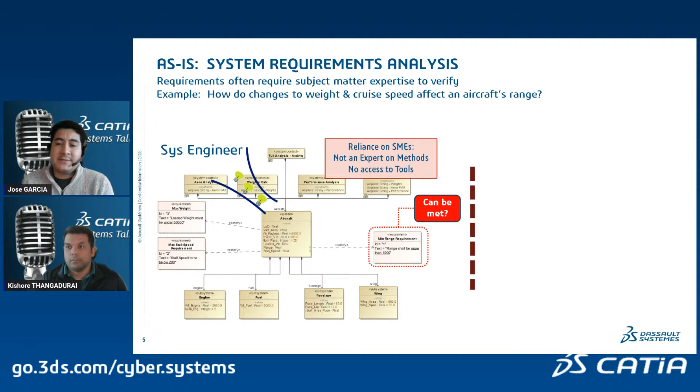The systems model already provides a descriptive definition of an architecture. However, the ability to assess its performance is incumbent on underlying specialized models developed by subject matter experts. Early design insights would be valuable to improve a design, but it is challenging to communicate and iterate due to expertise barriers, different data exchanges, and disjointed technical tools.

These siloed processes are slow, inefficient, and non-scalable. They introduce additional risk of human error and lack rigorous traceability. They also lack the opportunity to perform meaningful trade studies because we can't run them thousands of times without large hits to personnel availability.

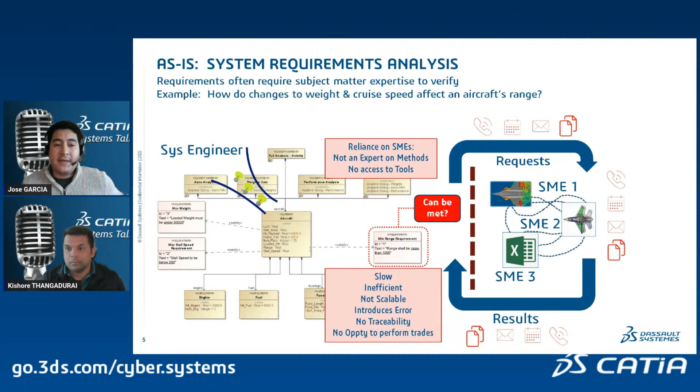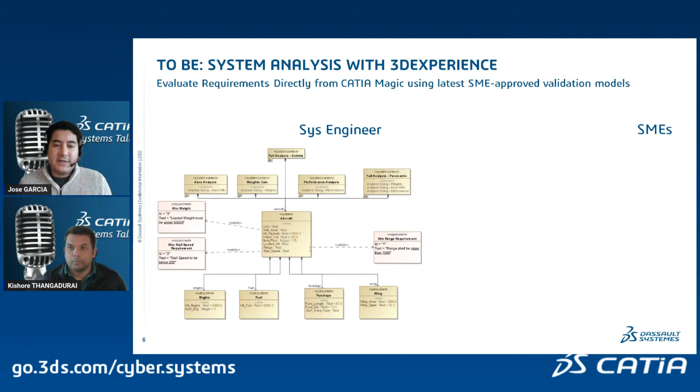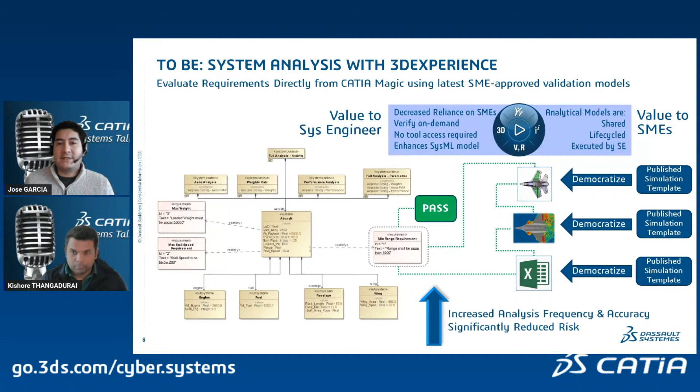A model-based approach is now the standard for modern system design, and its next step is integrated simulation. SMEs can develop and share their simulations with system engineers by utilizing the 3D Experience. The system engineers can then integrate those templates directly into the system model, eliminating siloed processes and enabling traceability and scalability. The net benefit is an increase in analysis frequency and accuracy, thereby reducing risk earlier in the design cycle.

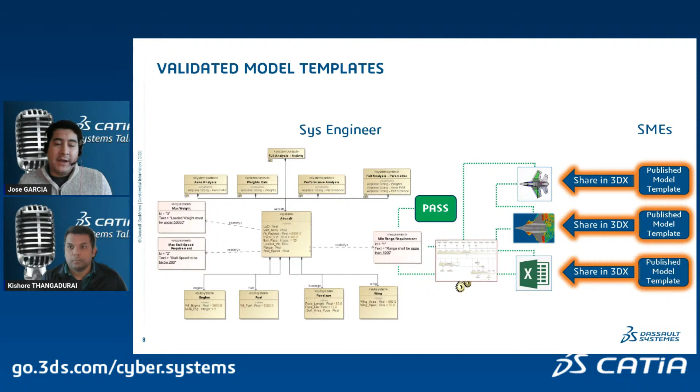So let's dive into how we can integrate these simulations. To go through these stages of the workflow, first we'll cover the creation of the shareable model templates to the right. So I'm going to hand this off to Kishore to cover.

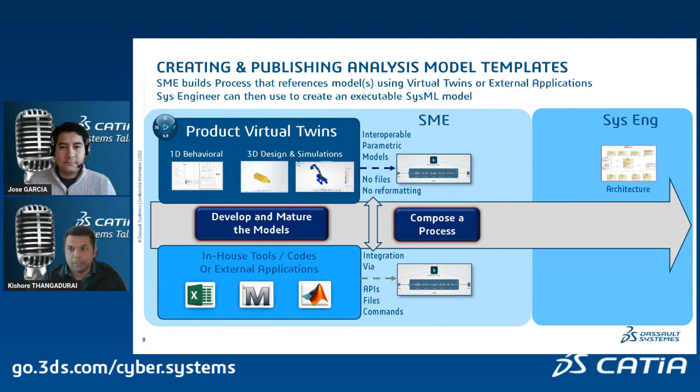Thanks, Jose. So first, a SME will develop and validate their models just as they do today. These can be product virtual twins on the 3D Experience platform, or simulations built with in-house tools and external applications. Second, the SME will compose a simulation process to define a workflow of their model and data processing activities. We will dive further into this in the simulation process in the very next slide. Third, the SME will configure the execution of the simulation process to create what's called a template.

This template is then shared with the systems engineer for them to add to the system architecture model and be able to launch an integrated simulation.

So to recap, we have SMEs controlling and validating their high fidelity models and specialized simulations in formats they use today. SMEs composing simulation process and templates from their models and sharing them. And systems engineer utilizing these shared templates to perform system analysis.

These templates directly document the SME's workflow, and inefficient communication loops have thus been removed so that the systems engineer can now leverage the subject matter expertise for as many analysis iterations as needed without having to tie up the SME availability.

So let's now talk about composing that simulation process. The Process Composer application provides you with a no-code drag and drop interface where you can define anything from a simple to a complex workflow. Within these workflows, you can define the necessary parameters, which kind of represent in the systems engineering the value properties, and logic to launch different tools, pass information between them, and define where they would execute.

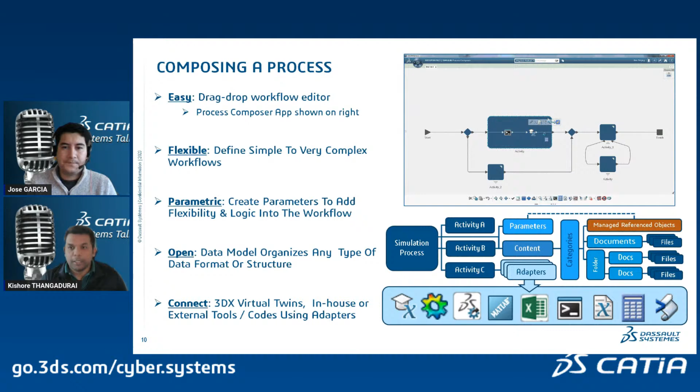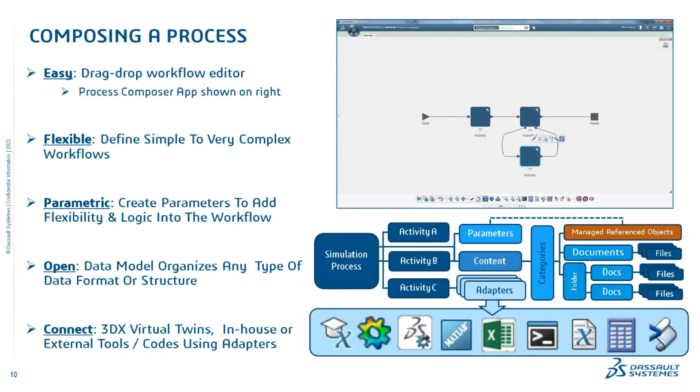Once you have the workflow defined, you would then create a simulation template exposing only those critical parameters for non-experts to feed in. So to reiterate, the open data format and adapters enable us to connect everything from the 3DEXPERIENCE virtual twins, in-house tools, and external applications, including code scripts, and build a template that can be then leveraged and used by any non-expert and systems engineers.

So in this example, like Jose said, we are looking at an aircraft architecture. And to help Jose as a systems engineer here, SME has developed 3 different simulation templates. It's the weights calculation at first that's made based on a parametric CAD model. It calculates the weights from the preliminary aircraft geometries, dimension updates.

They also have an aerodynamics calculation. This is based on fluid simulation, estimates the lift and drag of the aircraft based on the geometry updates. This essentially is executed on an HPC cluster. We also have a reduced order model developed for this, for it to be executing in a much faster fashion.

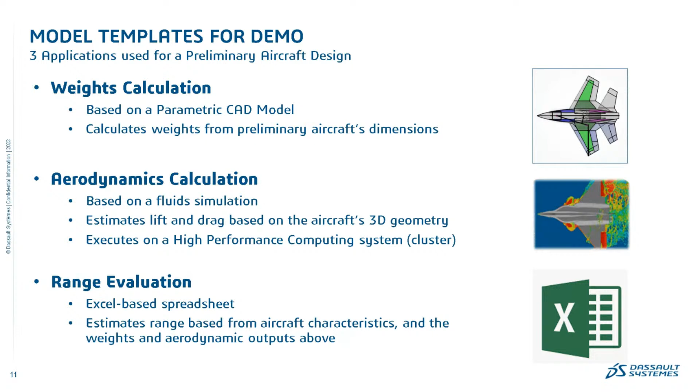And then finally, a range evaluation. This is an Excel-based spreadsheet. It estimates the range based on the aircraft dimension updates, and also the weights and aerodynamic outputs calculated in the above two simulations. So to look at this example, let's pass it back to Jose. Thank you, Kishore.

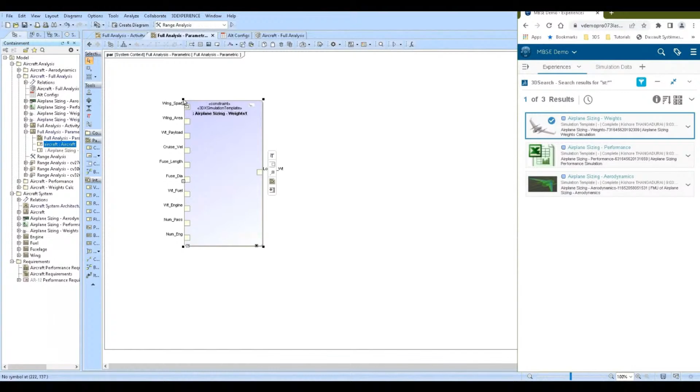So we start with a diagram within Cameo showing the aircraft, its subsystems, requirements, and analysis context blocks. We create a parametric diagram and we bring up a web browser window where we are already logged into the 3DX platform. From the web browser, we can drag and drop the SME created templates onto the diagram. Cameo automatically creates input and output pins, and the parametric equation wizard recommends parameter connections.

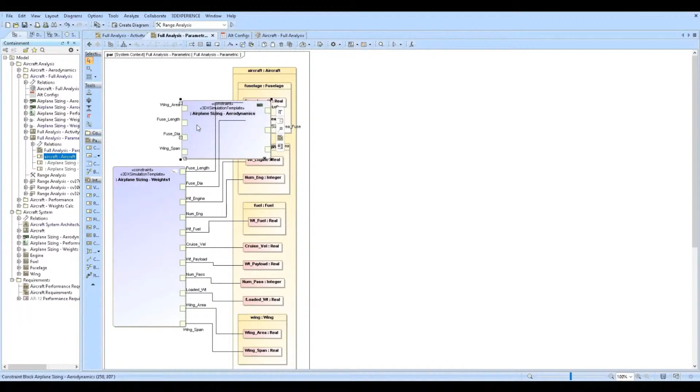We drag and drop the other 2 templates and set parameter connectors, which will enable us to pass values directly from the SysML model to the SME templates. In addition to parametric diagrams, we can also integrate templates into activity diagrams. Here we have dragged and dropped the templates from the 3DX platform and connected the pins in a similar fashion as the parametric diagram.

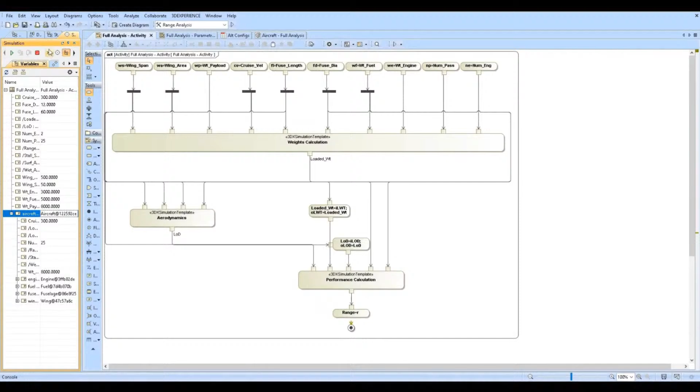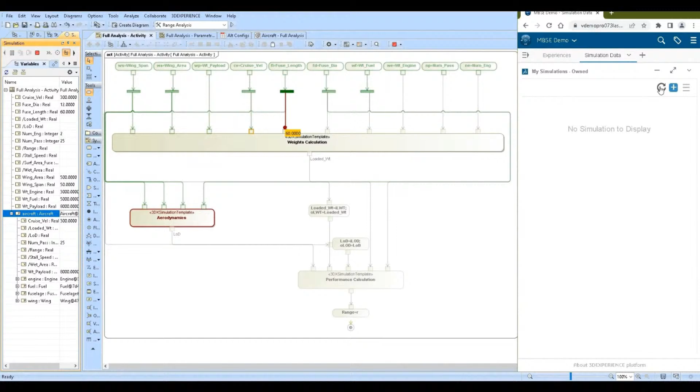We will run the simulation, and on the left you will see the system of interest and some predefined input parameters. When we start the simulation, you will see the parameters being read and fed into the templates. Once the templates have the required inputs, they will begin executing on the platform and returning results back to the Cameo model.

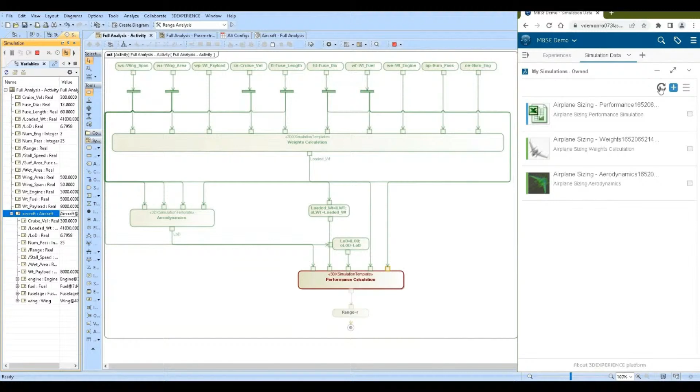For this example, we want to calculate the range for an aircraft given a set of inputs to see if the design can satisfy a requirement. At the end of the simulation, we will hover over that range parameter to see the associated requirement text, and you can already see that the range value is highlighted in green, telling us that we pass given the provided inputs.

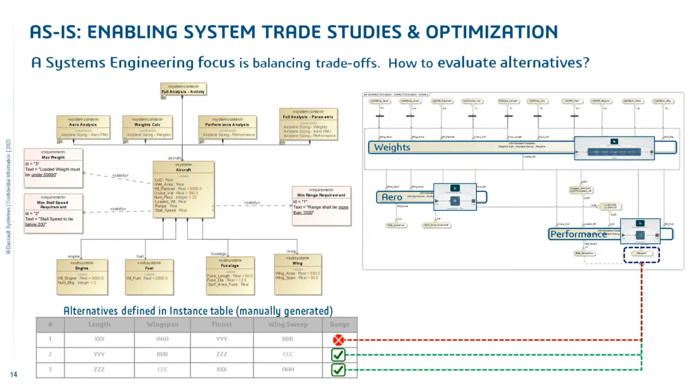All right, let's dive into how we can enable trade studies from this. In the previous video, you saw me run a simulation that evaluated range requirement satisfaction of a single aircraft design. If we wanted to evaluate different system configurations, we might create an instance table and run simulations for those configurations. We find that this approach can be tedious.

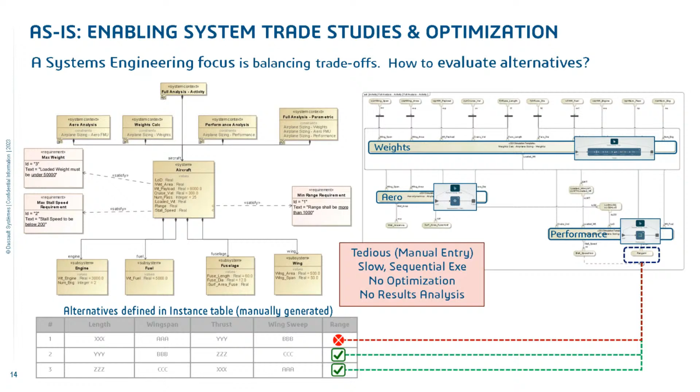Simulations are run sequentially on your local workstation and likely slow. System alternatives are your best guesses without true design exploration or optimization. So let me pass this off again to Kishore to discuss how we can address these gaps.

Thanks again, Jose. So yes, like Jose said, what you saw in the first video was a single iteration. And as you want to perform or explore the complete trade space, let's look at how the 3D Experience platform can help you here. The application of choice here again is Process Composer. As we saw in the first section, Process Composer uses adapters to connect with external tools and launch those tools. So we have the Cameo or MBSE adapter here that ties in your system model.

The system model can be integrated at any level of the system configuration. Once you have that tied into this workflow or as part of the process, it can then be driven using the driver adapters that use different techniques that are built into the platform, like DOE, optimization, and reliability techniques. To dive a little bit deeper on those, what the 3D Experience platform has is 11 different design of experiment techniques that help you efficiently assess the design space or the trade space.

We have 16 optimization techniques to drive design towards desired objectives. That also includes DS proprietary hybrid optimizers. We also have Monte Carlo simulation for reliability to evaluate robustness of designs by introducing uncertainties and tolerances. Okay, so as you tie into one of these existing techniques, what we also help you with is automatic generation of that trade space or design space.

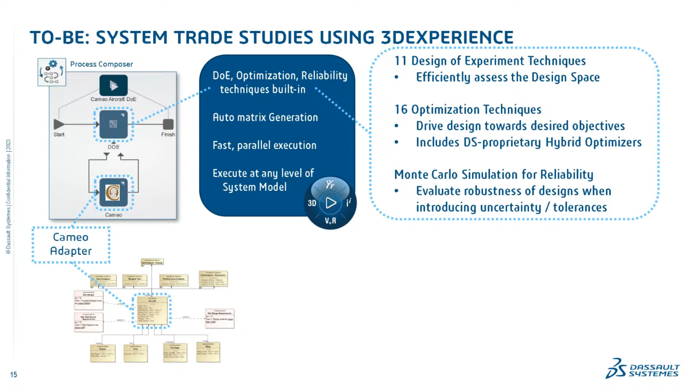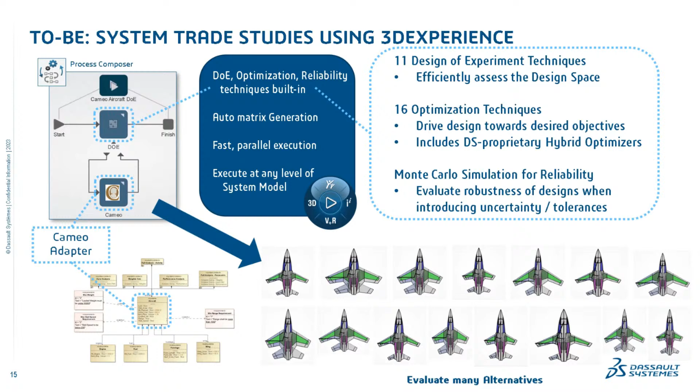You specify the upper bounds and lower bounds and the different parameters or criteria, and it automatically builds the design matrix for you. Not only that, thanks to the distributed execution capabilities of the 3D Experience platform, we are able to execute these in a fast and parallel fashion. And like we talked about before, you can execute this system model at any level. So we run that, different alternatives are generated. So in this case, we are changing the aircraft's dimensions to see which aircraft might meet our requirements best. So we have generated tons of different alternatives.

What next? Now we have tons of data in our hands. How do we proceed from here? To enable you to perform that trade-off and pick and process these data and understand what might be the best design, we introduce Results Analytics. Results Analytics is a web-based widget. I like to call it the decision support tool in the 3D Experience platform that helps you easily manage all these large data sets that were generated.

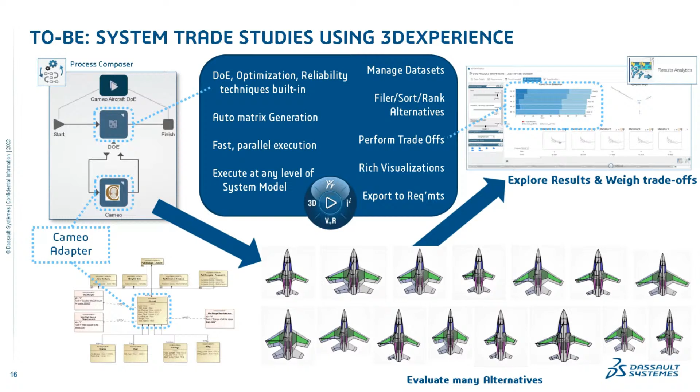It automatically filters, ranks, and scores all these different alternatives and enables you to perform trade-offs thanks to its rich visualization capabilities. Also, to highlight here, it helps you export an FMU, a reduced order model, from these huge data sets, and also provides you the capability to export and tie back to the requirements that you began with.

So let's take a look at an example in this case. So we are going to use the same aircraft system model to calculate the range. We're going to drive that using an optimization adapter to explore the complete trade space to see what design alternative might best meet our requirement. So I have the Cameo adapter here. That blue box is called an activity. And the Cameo adapter, of course, is going to launch the application. And you can see that we have parameters defined which correspond to the value properties of the system model.

So once I have that integrated, then I can drive that using an optimization adapter. There are various optimization techniques available. We are using the adaptive DOE technique. The section here shows the configurations of the optimization. In this case, we are using 10 different combinations, and I think 42 points per each iteration.

And I'm able to also quickly define the design space or the trade space. This information can be directly read from your system model if it is defined so. Otherwise, you see that you can quickly define the lower bound, upper bound, step size, and whatnot to define the trade space or the design space. You are also able to define constraints and objectives, of course. In this case, we are trying to maximize the loaded weight and also the range.

On top of that, like I mentioned, using the 3D Experience execution backbone, we are able to execute this in a parallel fashion. So once I have that workflow finalized, I'm going to run this. To highlight the distributed capability of the execution, it lets you run this on server-side simulation, or if you're using desktop models, it could be distributed to run on multiple desktops in a parallel fashion to quickly generate the data set. So that execution has happened, and we have generated the data set.

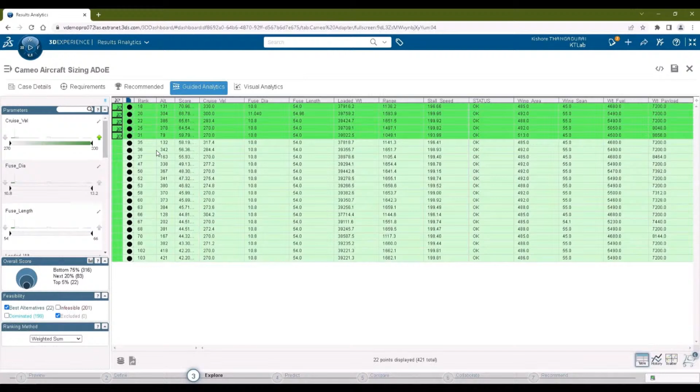So let's, in this case, take, let's say, 5 different alternatives and compare those side by side to see which of these best alternatives might meet our requirements best. So I select those and switch to the compare tab. Again, it highlights, by comparing those alternatives against each other, whether a particular alternative meets a particular objective better or worse. The given objectives being cruise velocity, weight of the payload, and range.

We also have a spider plot or radar plot in this case. Of course, the further the point, the better it meets that particular objective. So we have some design alternatives that do better in a particular objective alone, like either cruise velocity or weight of the payload or range. But then you see that little green alternative 378 there that has a good balance. So that might be a good combination for us to work with.

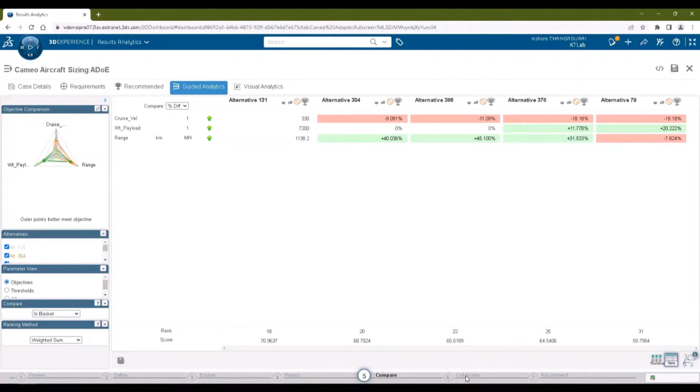You're not just limited to these visualizations. You can also perform trade-off analyses from here. To do that, you switch to the Collaborate tab. In the Collaborate tab, again, you get the same tabular visualization to compare those side by side. But you see that with everything given the top priority or highest weightage, the system is by default recommending that alternative 131 best meets your requirements.

Okay, so what if we want to change the weightage on one of these? We, of course, want higher priority or more importance on weight of the payload and range, but maybe we could compromise a little bit on the cruise velocity and see what happens. So if we reduce the weightage on cruise velocity, you see that in real time, the system is automatically re-ranking and scoring the data set to now recommend that alternative 378, which we already looked at in that spider chart, might be your best alternative given this changed set of weightage.

So what? A lot of thought process went into this, a lot of decision making went into this, and now finally we are picking to say 378 is our best alternative. How do you capture all these things? So here you are able to select something as a recommended alternative, thus capturing all the thought process and decision making that went into this process.

Not only that, you are also able to then export that from here to tie in and update a requirement if that exists, and this demo will show a requirement. You could also tie this back and update your system model to say, hey, given the different trade analyses, we found a particular design or multiple designs which might be of best interest for you, and tie it back and update the system model for, say, an instance table or whatnot.

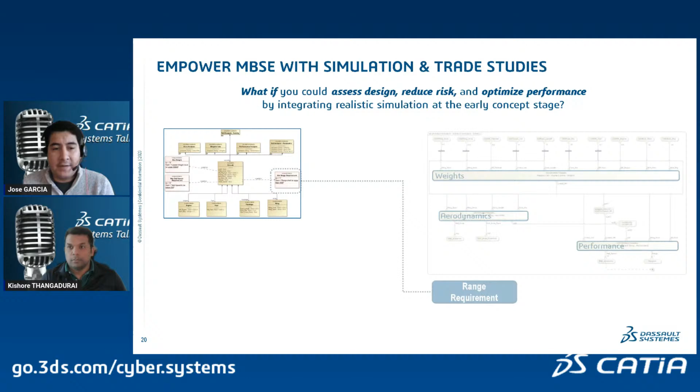All right, so today we covered how you can assess design, reduce risk, and optimize performance of your system design by integrating these types of realistic simulations. We showed how the 3DEXPERIENCE enables integration of domain expert simulations and enables trade studies across many system configurations by leveraging CATIA Magic and SIMULIA Process Composer to ultimately assist decision makers in identifying optimal solutions with SIMULIA Results Analytics.